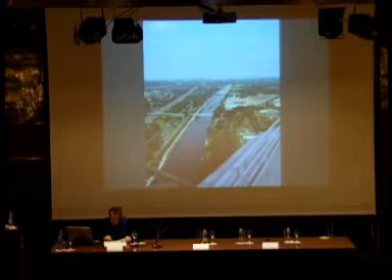At present, cultural landscape is the vision of an anti-world onto which the positive aspects of future can be projected. Cultural landscape, thus, is the conciliation of technical exploitation with the idea of nature. Landscape, as a term, always expresses a very advanced civilization. Consequently, it forms in phases of development in which daily survival is secured and during which deeper thoughts and future projections on the space of living can be realized.

In this process, the space in question usually grows. The interrelations grow more complex. The margins for change, however, become narrower and the decisions more political.

The vision of landscape thus always has relations to current defects. As a result, archetypical imaginations of landscape have been evolving in the course of human development, such as the model of paradise, the perfect oasis.

During famines, they were more like the land of plenty, with their flowers and pet birds more dedicated to pleasure. One time, paradise is the land where milk and honey flow, and another time the land where one can live without sins and can take from the tree of knowledge, or live in Arcadia in absolute freedom. A concrete picture of such a garden is the Garden of Gethsemane in Jerusalem, which is older than 2,000 years.

Nowadays, we already speak about paradises if basic needs are satisfied, such as clean water, clean air or clean food, or simply spaces which are open without restraints. The problem of the new type of amusement landscape, such as Disneyland, is not the kitsch of its appearance.

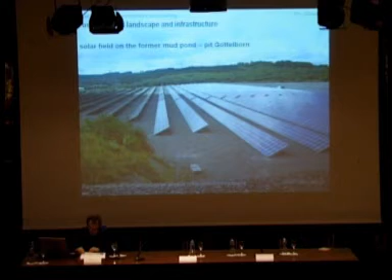Cultural landscapes have to implement rationally and pragmatically specific tasks, that is, to follow an ecological concept, which nowadays we call sustainability. This means also participation. It does not work with so-called ecological design. Ecology is not a design language. Design languages are open, but ecological requirements have to be fulfilled within this project, whatever design may be chosen.

After all, it should be a matter of course not to deal in the first instance with near-natural production areas. Instead, we have to care about those spaces becoming more important as living space, and this already in the last 200 years.

It is an urbanized world where, because of its density, it will be much more difficult to realize visions of landscape. The oasis, as a mini spot of an intact island, rises above itself. As a philosophy, it seizes the future of the urbanized world where the coincidence of nature must have its place.

The examples I want to show are: the Europe town of Kirchberg in Luxembourg, the Parco Dora in Torino, the Old Harbor in Bremerhaven, the landfill Hiriya in Tel Aviv, and I will come to the end with a view back on the landscape park Duisburg.

I will touch upon a typical aspect in these examples, water management, and thus simplify the higher complexity for today. Here, the dealing with water and climatic effects is rather playful.

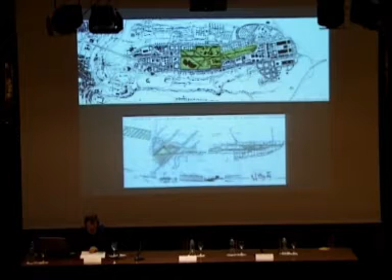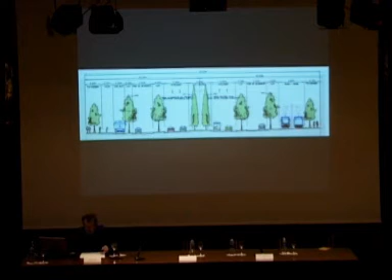Its most obvious example is the transformation of the motorway into an urban boulevard. Once a road being organized only for the cars, it is now a three-line traffic system for pedestrians, cyclists, cars, and public transport. Important is that people need not to be protected against the road anymore. People stay there, sit there, use it as public space.

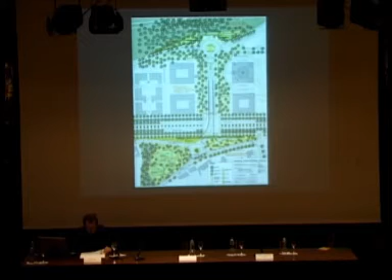The last part of the avenue is under construction. It combines the traffic facility with the public open space. A new green connection interlinks the Roman Road Park with the Belvedere on the other side of the boulevard. A long pergola, which is built into a steep slope, opens up a wide view into the landscape.

The same principle is realized already where the Central Park is turning towards the roads and forms a green quarter together with schools and sport facilities. Parks and avenues belong to a European arboretum that gives the green model of the European town a symbolic identity with a collection of all species of Central European trees and shrubs.

Main features in the parks are groves, which will provide a shady canopy, and water. The new urban density requires a specific rainwater management, which should combine the technical issues of retention and drainage with

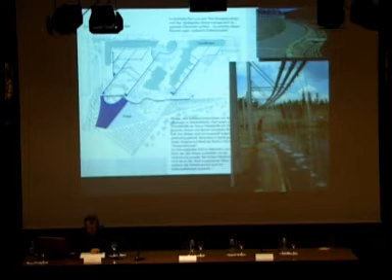the aesthetic use and pleasure in the park. Water is flowing from large surfaces and roofs into a lake. The quality of the water gets improved by an oxygenation system. The water arrives in open channels and gets circulated by a water curtain and fed into the lake.

Part of the system is a subterranean reservoir filled with gravel underneath the higher-lying meadow. Therefore, the water remains cool and clean. Another part of the rainwater retention system is located in a small valley in the city boundary. It combines the technical demands with near-natural construction.

Surplus masses of road construction works form dune-like sculptures of earth, and spiral-shaped hollows fill with stormwater. Due to their geometry of a negative acceleration, they slow down the water and give it off in a controlled way. The basins always contain water and represent the ecological reserve. The park, with its technical ponds, is a valuable recreation area for a new town quarter.

I will now continue with the reclamation of former industrial land. On the site of the future Parco Dora in Torino, we have to interpret the existing landscape, the different information layers which form the structure of a landscape: the industry, the river, the infrastructure, visual connection, and so on.

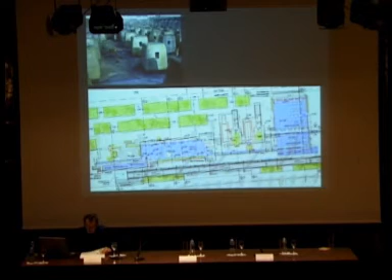The subconstruction, with its fascinating concrete patterns, will become water gardens, more or less the outdoor living space for residential buildings, offering a new biotope for water plants and specific fauna.

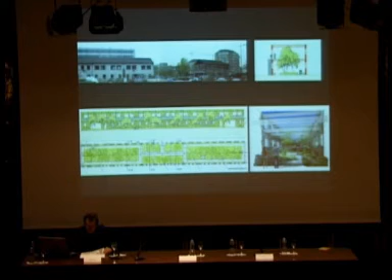The inside of existing, then stripped buildings will be opened, their outer walls enclosing horticultural enclosures with a special vegetation. Ramps and staircases made of recycled steel will connect the different levels. The walkway crosses the street and continues into the central part of the park.

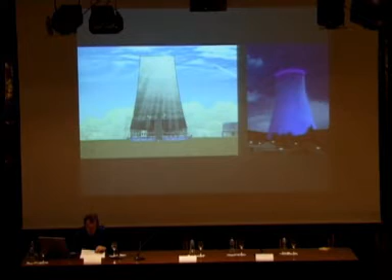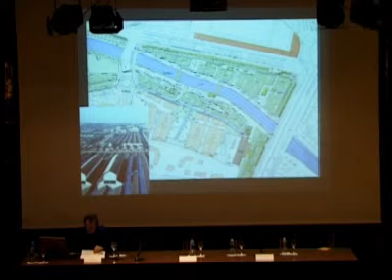The former cooling tower will be made accessible and kept as a prominent landmark. Within another part of the park, the trees will form regular patterns of shady growth. They follow the grid of the pillars in the former historic structures.

The groves will offer spaces for a great variety of activities. Following the ecological task, they will be built only with recycled material. The heavy concrete plate covering the river will be removed.

It is one of the first actions to liberate the river from its dark cave. The concrete pillars will remain. In the metamorphosis, this part becomes a technical gorge with wild water rushing between the promenades.

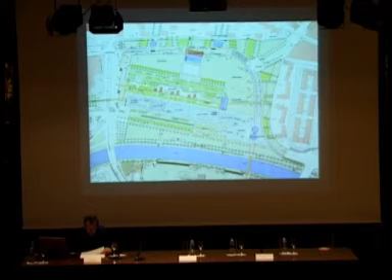The central area with the halls and the spaces around them will be used intensively for sports and play, for exhibitions or different sorts of events. The larger hall will be changed into something we call a futuristic jungle.

The construction of the smaller hall with its impressive steel pillars is still in good condition and therefore preserved as a sheltered loggia of the town. Ruinous parts are already removed. You can imagine all sorts of activities and events in this generous public space.

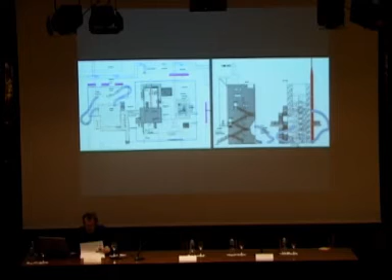Vegetation and public life will move into the former production areas. Here, for instance, one of the stair towers combined with a slide for the amusement of the young.

The grid of the pillars, here already overgrown on its way of transformation into the steel jungle, continues with the trunks of flowering trees outside the former hall. You can imagine the red steel columns with the green slowly conquering the artificial environment.

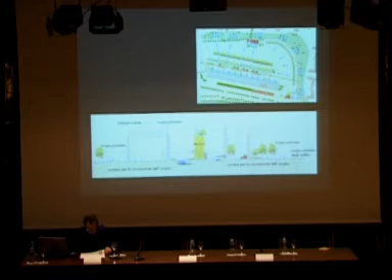We will install an effective drainage system with runoff from buildings feeding cisterns and open drains. The circulation of the water will be operated by solar energy. On the ground level, small channels filled with rainwater run through the new open space.

They are part of the rainwater system and the ecological circulation of water in the park, which included also the water gardens and the sub-construction as I have shown before. The towers of the former cooling plant are the main elements of the new rainwater system.

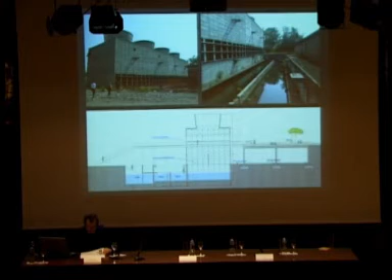They get transformed into water gardens and gardens with special climatic effects, which can be watched from terraces and high-level walkways. Decorative lighting gives prominence to the monuments and the highlights of the water system. The futuristic jungle at daytime and a mysterious world in the night.

The old harbor site in Bremerhaven is realized already in large parts. The old harbor has lost its former significance. The locks were closed, the buildings around the harbor basin were demolished.

The town itself is well known for its ship's wharves and for its historic importance as the place where immigrants left Germany to find a new home in America. The house of the immigrants is part of the conversion of this area.

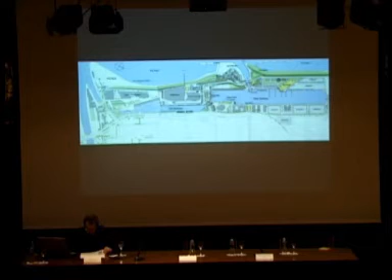The revitalization of the old harbor aims to reconnect the river Weser and the city center, and to become the core of new residential and recreation areas with public squares and promenades, a marina with boatyard and sports boat lock—a complex structure, both town and landscape, building and open space, harbor and park.

In this new town quarter, the open space concept is realized before the construction of the buildings in order to attract investors and especially to offer attractive public areas very early. The planning refers to the existing urban pattern.

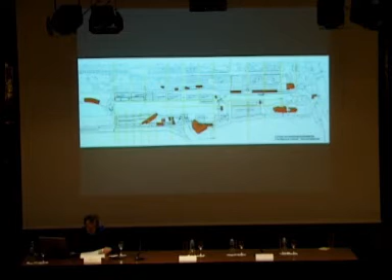It follows the strategy of a metamorphosis which is based on historic elements. Existing attractions will be combined with new touristic entertainment and cultural facilities, as well as with exhibition and trading zones.

Here is the former supply depot of German Lloyd, now a maritime center. The old Bascule Bridge and the historic lighthouse.

The concept aims at establishing a strong language of forms for manifold demands, taking into account the rough climatic conditions. One material characterizes the quays, the promenades and squares. Continuous carpets of natural paving stones create quiet and generosity in view of the future heterogeneous build-up areas.

Like inlays, particular materials are marking special spots, like the Lloyd Square, which represents the entrance to the harbor. Situated within the axis of an urban road, it forms the center of a sightline from the city to the river and the historic lighthouse.

With its wooden materials, the place offers an inviting atmosphere in the rough maritime climate. A special bench with modular design has been developed for the place, being both seat and sculpture. During festivities, a lattice pylon illuminates the deck.

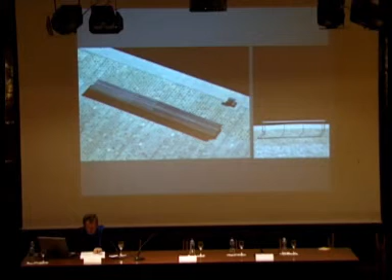Also here, the elements of street furniture are specially designed: drainage elements, service units for high voltage power, benches, lamps, and lighting poles with integrated flags.

On the western quay, a new wooden bridge is crossing the historic entrance of the former dock, which was preserved in its outlines. The bridge creates a continuous pedestrian connection and represents a new landmark.

Spatial impression and visual connections are supported by a differentiated light concept, which emphasizes the historic buildings and gives orientation from far away.

Sparsely inserted trees and the street furniture symbolize the change from a pure harbor to a public space. Here at a famous event, the so-called sail, when legendary sail ships gather in Bremerhaven every 5 years.

With another example, I would like to show the rehabilitation of a landfill, the Hiriya in Tel Aviv.

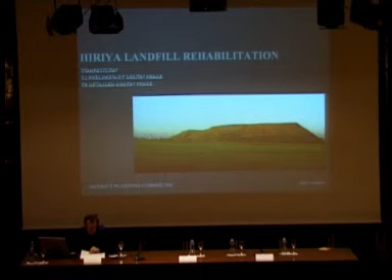From a long distance, Hiriya appears as a mystic mountain. This genius loci has been the objective of art, which understood the landfill as an object. Now it turns into a landscape and a planning program.

The design approach means that Hiriya is growing into details to get a stability which will be secure for the next decades. It is also a big challenge for the engineers. Here's the extraction of methane.

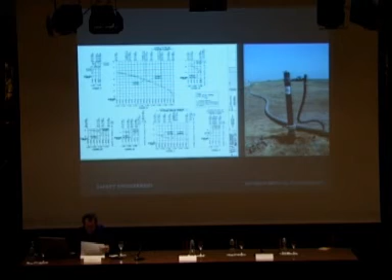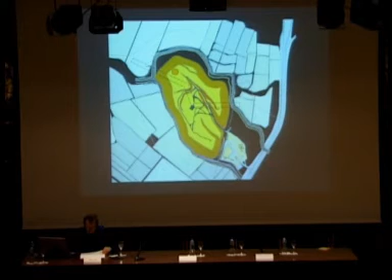Hiriya now consists of the agricultural plain, of the two narrow riverbeds deeply cut into the plain, of the steeply ascending mountainsides, and of a plateau which is more or less a desert and differentiated in the interior. Something you could call a valley leads into a very special space in the center of the plateau.

For this landscape, we have to find a new language. The existing shape of the mountain, 65 meters high, is unique. We want to preserve this appearance by keeping the steepness.

This is done while always keeping in mind the requirements of engineering, the enhancement of the slope stability, here with terraces at the toe of the mountain.

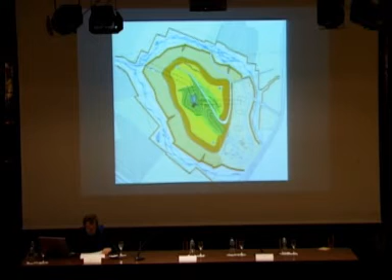Our conception refers to a certain sequence: the foot terrace as a counterweight, the wadi, the steep slope, the plateau, the inner oasis with inside terraces. These landscape elements, shown in the competition plan, are now the objects of a detailed planning.

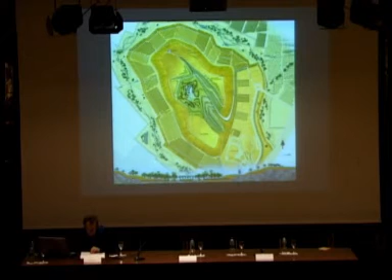It was important for both form and security to relocate the existing stream from the toe of the mountain, in order not to sodden it and to prevent inflow of unclarified leachate into the water. In the future wadi, streams will meander freely and trees will be arranged in informal patterns.

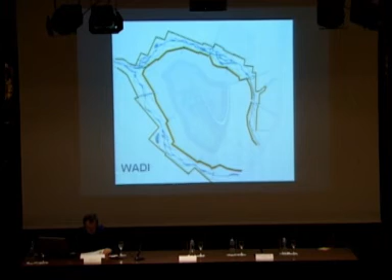There are also paths crossing the wadi on a higher level, connecting into the next landscape element. The foot terrace is constructed as a counterweight. Six million cubic meters of heavy debris will help to stabilize the sensitive toe of the steep slope.

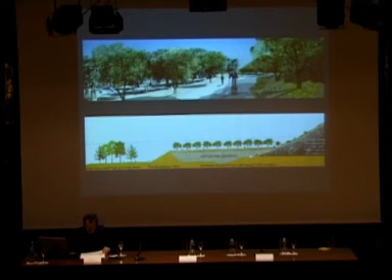The image should give you a vision of the future landscape, which is formed by agricultural use. The steep slope keeps its actual fascinating shape. Just like the slope, the plateau is very sensitive to changes of the silhouette.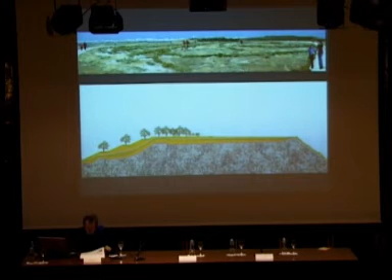We think that the meager and low vegetation, like garriga, should stay knee-high at the most. In the midst of the hill, with this lower-lying terrain, we would plant higher-growing vegetation. Here, and in the deeper-lying oasis, different protection layers will be necessary.

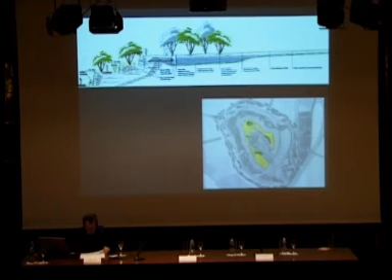Sealing because of the methane emission, which prevents water from seeping into the mountain; a water collection layer; and a layer of vegetation which covers the layer of drainage. At its inside edges, above the sunken area, the plateau will become the highest terrace of the inner heart, of the inside terrace and the sunken garden.

The garden is the most important element, forming an autonomous landscape, an oasis which gets a more intensive shape. It will be irrigated with rainwater collected from the large plateau, but also with recycled water coming from the recycling park and the biogas plant, which are built at the eastern foot of the mountain.

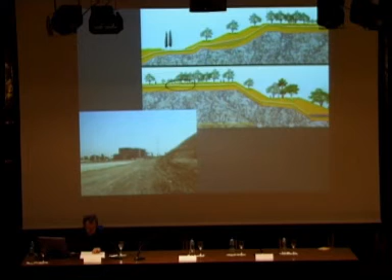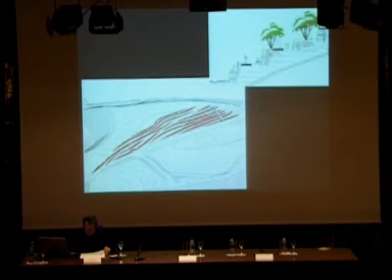Therefore, we can imagine green terraces throughout the year in a desert climate. The form of the terraces results from a rather unpleasant situation: the mountain is not stable, the garbage is moving continuously. The supporting dry stone walls are made of the same material as the foot terrace—just debris, which gets remanufactured in the recycling plant.

The terraces will offer wide views over the low-lying terrain of the inner oasis, which will have an even denser, even tropical vegetation, due to a special irrigation and retention concept.

The drainage layer empties into a water horizon, completely sealed and consisting of recycled gravel. It is covered in a way that 50% of the pore volumes are preserved. Soil and gravel bodies are installed above the gravel reservoir and the sealing, where plants can grow which have their feet in the water and their heads in the fire.

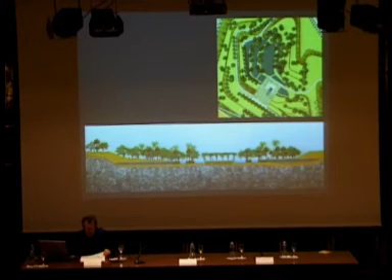This concept of underground water storage simulates the system of a real oasis. The subterranean reservoir, filled with gravel and water, helps to minimize evaporation and to keep the temperature low, in order to preserve the quality of the water.

We would also like to get full shade by trees growing around it. Species with different heights are forming a double canopy.

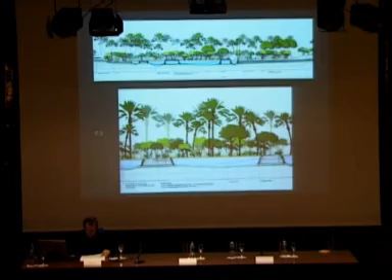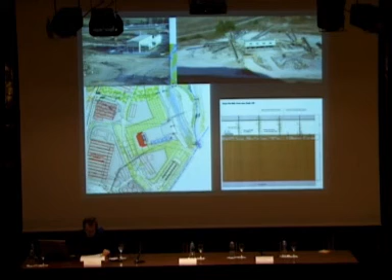Towards the recycling park, which is situated immediately at the eastern foot of the mountain, the slope is secured by a sheet pile wall. A visitor's promenade will be built on top of it, with a railing and a filigree pergola added to the rough wall.

It will offer views to the visitors' center, already open to the public, and to the interesting course of events in the recycling park. The object of examination is what is usually hidden elsewhere.

At the end of my talk, I would like to give you a view back from the landscape park Duisburg Nord. We learned that industrial ruins are not at all ugly and useless—no, there can be fascinating structures when changing into layers of a landscape.

The new vegetation types being created, and the contamination of the soil, give cause to think in another way about ecological phenomena.

I will use the pictures as a background for a more theoretical discourse which accompanied the process of development. This means, on the one hand, the dealing with the existing, and on the other hand, the consideration of nature.

Environmental damage and pollution are very likely still to be the first things we associate with mines, steel factories, or landfills. We find the reality to be chaotic.

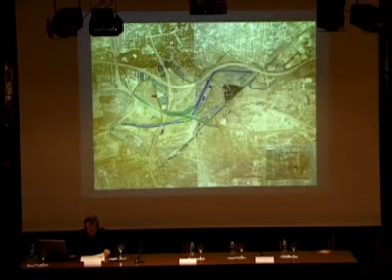The aerial view shows a scattered site, cut into fragments of infrastructure lines. In this area, individual park systems operate independently. The top layer is the railway park, with its high-level promenade.

No. Excuse me, I have problems finding this.

And the bottom layer in blue is the deep-level water park. Other systems are the single fields and clumps of vegetation, and the promenades in yellow which connect the towns.

It was necessary to use a new analytic method to become familiar with the existing patterns and their systematics. We had to learn, for instance, to run according to the movement of a locomotive.

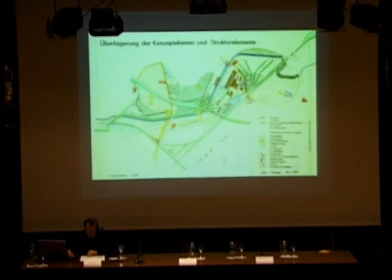Underneath densely growing vegetation, we discovered the large rail hub, once developed as a system of working with gravity. A dozen tracks at different levels can be experienced as mountains and canyons. Now a huge piece of land art has developed, slowly elaborated by gardeners.

When working in a post-industrial site, it is also essential to create new connotations. Thus a huge machine becomes an object of identification, a landmark, or a mythical and fabulous creature. A blast furnace is not only an old furnace, it is a menacing dragon rising above its surroundings.

Now tourists climb over and through the ruins of production, eager for knowledge, to learn how to deal with the objects anew and use them freely according to their own imagination. Spaces are created for new sports that used to be associated with foreign landscapes, such as climbing and diving.

The old gasometer was flooded with water and contains a submarine world. Spaces are created for use in a former ore depot. Desolate and rundown spaces become places for public events.

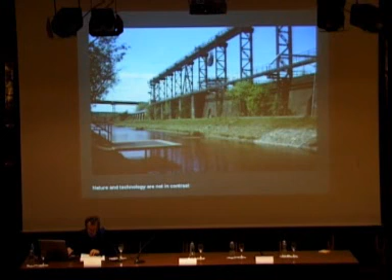Natural water no longer exists on the site. The first zone of saturation is contaminated by polyaromatics. The open wastewater canal was used to carry non-treated sewage.

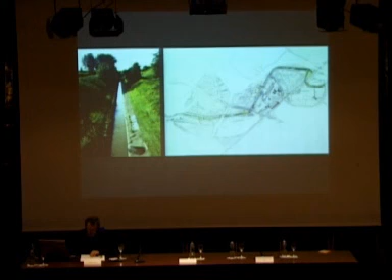For the new water system, we used the same profiles to avoid contact with polluted ground. We left this profile only here, where we had to cross an existing slag hill. The profile is sealed by a layer of clay, and the wastewater is carried within an underground main.

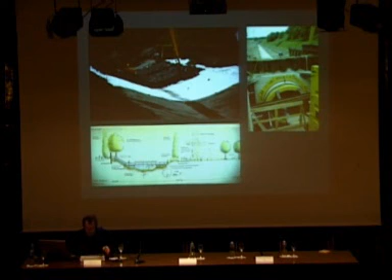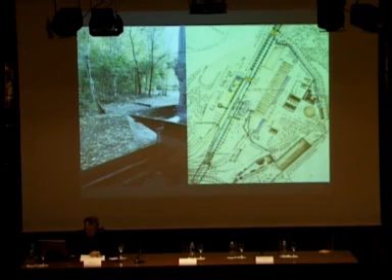For the new water system, rainwater has to be collected. It flows in open rivulets through the existing overhead pipe systems, falling into former cooling ponds, becoming enriched by oxygen.

The basins were cleaned, and now water lilies and iris bloom in pure water, and fish and dragonflies live in a new biotope.

Former settling tanks were cleaned up of arsenic mud that was squeezed out and loaded into old mines. They are now supplied with clean water. The collecting water paths flow into a clean watercourse.

Platforms with seats invite visitors, and little islands are colonized by flora and fauna. A spectacular installation was set up in the former mill tower of the sintering plant.

We wanted to use the power of the wind for an oxygenation system. Water is pumped up from the canal and falls from several points after having made its way through the gardens.

The water channel and the whole system are an artifact which aims to restore natural processes in an environment of devastation. These processes are governed by the rules of ecology, but initiated and maintained by means of technology. The system is at one and the same time natural and artificial.